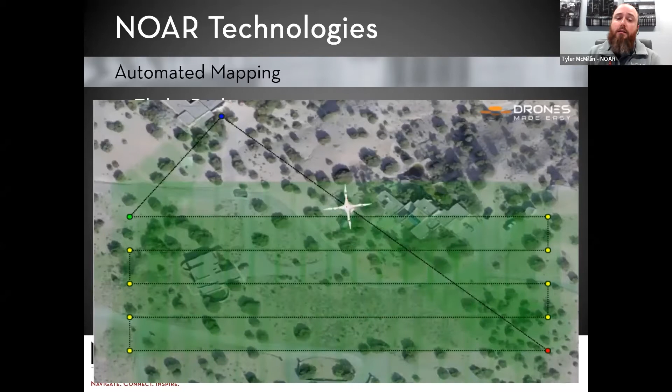So the video you see on your screen here is just a simple example. Essentially, if you have a construction site or a site that you need captured, we just window the area on our controller, tell the drone how high we want to fly, and then the software takes care of everything else. So it flies this automatic path, taking photos throughout the whole time, and that then gets processed into something usable for our surveyors or for our engineers and design team.

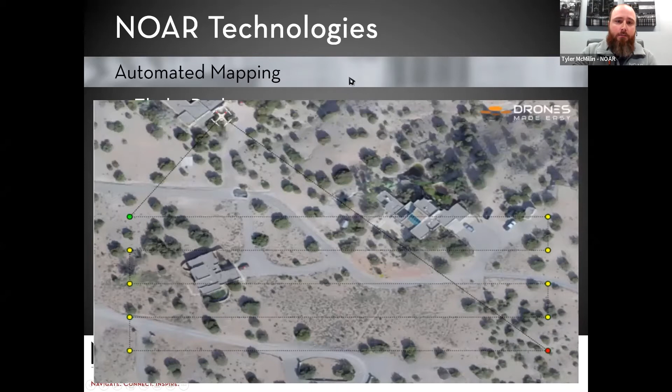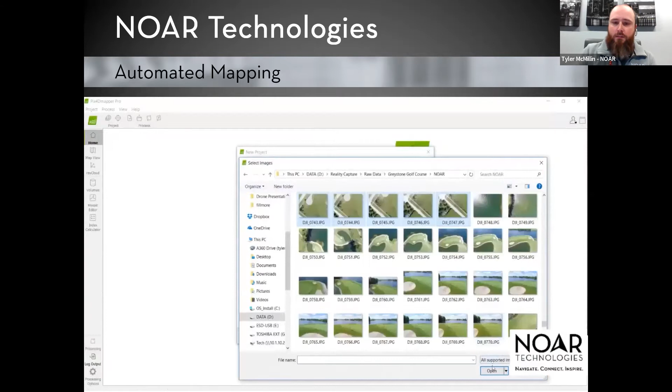So once the map has been flown, we're just left with hundreds and hundreds of raw images. So we need to convert those images into something usable, and we can use a variety of software. The one I'm showing here is called Pix4D. Essentially, we're dropping in all of the photos, and then we let the software run a photogrammetry process. This process involves matching the photos between each other and producing millions of points.

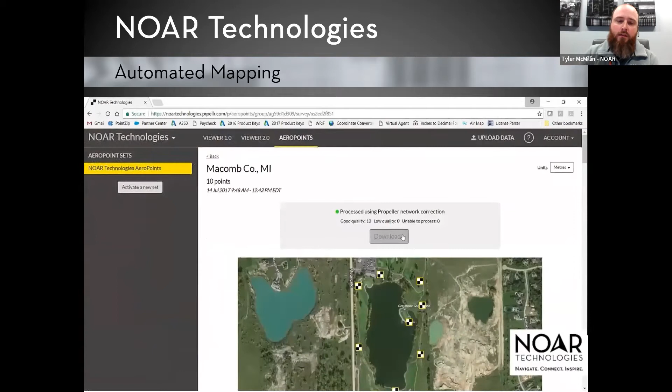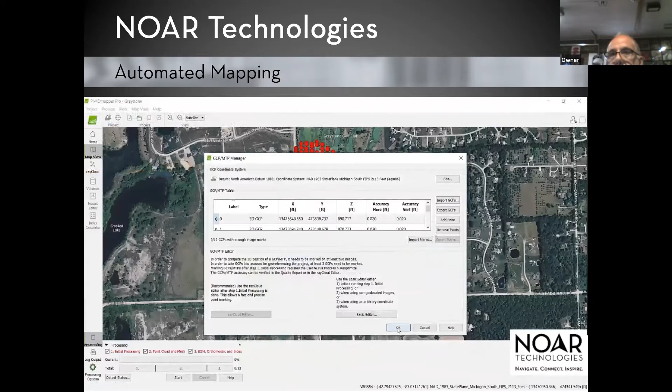We can geo-reference these models using either ground control points, GCPs, or some of the drones I'll be showing do have RTK capabilities, which is real-time kinematics. And what we're seeing here is actually entering in the survey coordinates for these photos. So we just have markers out or targets. We mark the center of the target, and that geo-references the entire model.

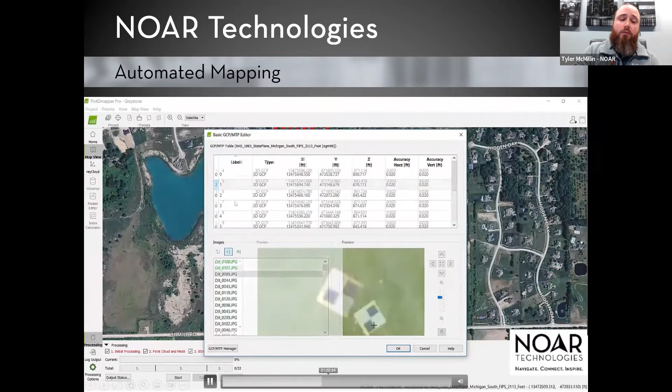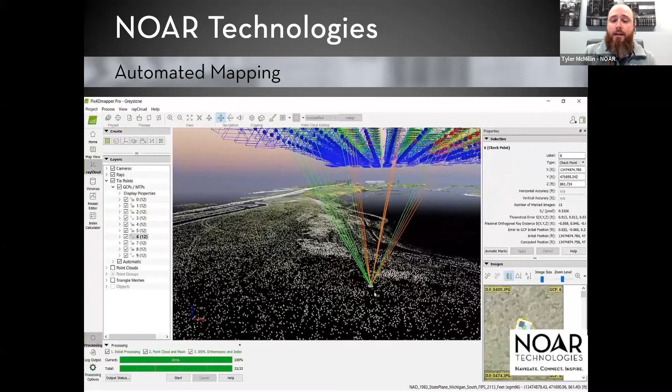Once processed, we end up with a large kind of point cloud. A point cloud is going to be just millions of points with an XYZ coordinate. And then just like a traditional survey, any point that is visible, we can get the XYZ coordinate and bring that into programs like AutoCAD or Civil 3D and use those for drafting and design purposes.

So the simplest deliverable that we kind of work with is the point cloud and the aerial ortho image, and that's just capturing the initial site development and site conditions. The beauty of drones is that we can capture these very, very large areas very quickly and use these for things like your historical preservation or just simple site and design planning.

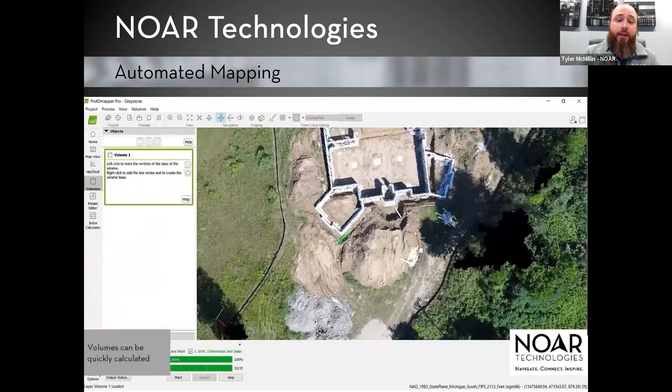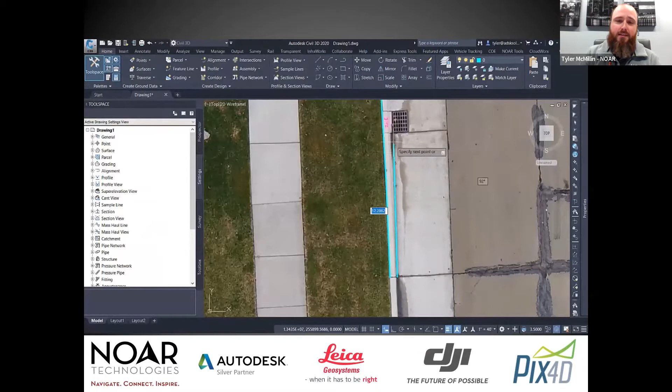A simpler deliverable is a geolocated ortho image. So what you're seeing here is just a 2D aerial image, much like Google Earth. But if you've ever taken a look at Google Earth, I know a lot of engineers use it as a reference, you might notice it's a little bit out of date. So capturing these sites with drone photos allows us to have an updated image that we can use for things like an ALTA survey or just site development.

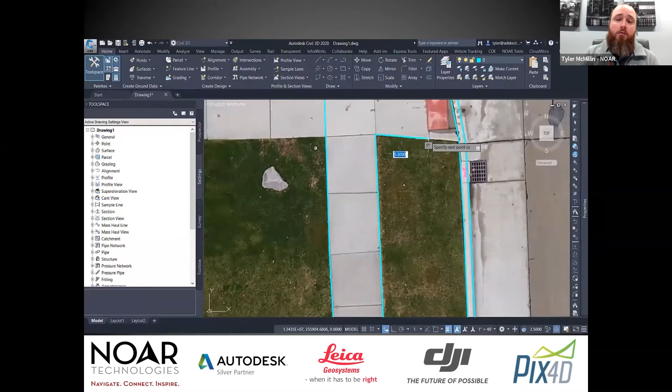We can also use these drones for capturing the site conditions before and after any construction, so we know if anything was disturbed or how things have been moved and changed over the lifespan of the project.

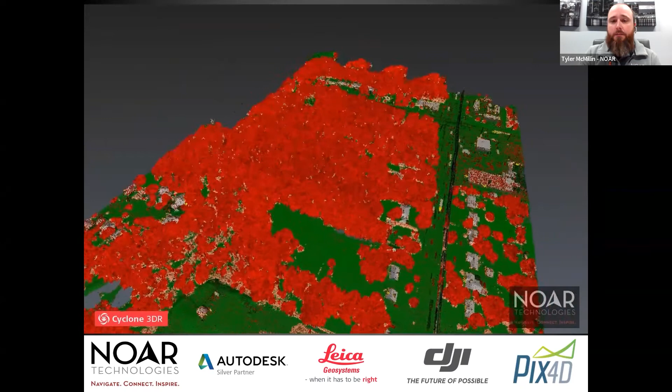In addition to our normal ortho image, we can also take a LiDAR laser scanner and fly over areas that are heavily wooded or covered with vegetation. We can then remove things like the vegetation and tree coverage to create an existing ground surface. For construction planning or surveying, getting your existing ground is really the first step for the project, and with LiDAR systems we're able to cut through heavily wooded areas or vegetation.

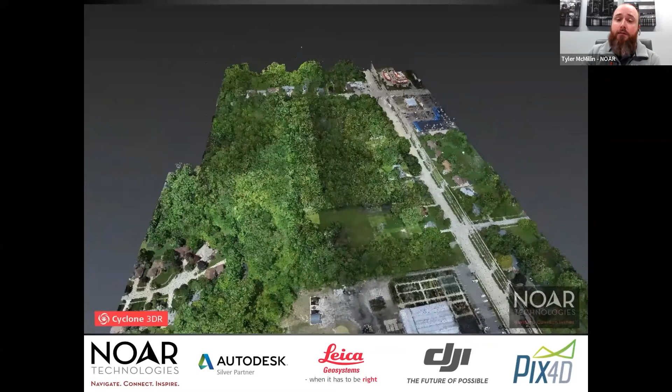Traditionally surveying a site like this down in Cleveland, where they're developing this wooded area, the surveyors on the call will know that surveying in the woods takes quite a bit of time and is not the easiest thing in the world. We can do this with our LiDAR drones in a matter of minutes.

These mapping flights tend to take about a half hour. The largest site I've ever done is about 1,200 acres, and that took roughly 6 hours of flying. So we're covering very large areas very quickly.

Now, the drones we're using, like I said, NOAR Technologies is a DJI Enterprise dealer, meaning we focus primarily on DJI drones. There are a few different entry levels for these drones. The basic one I want to look at is the Mavic 2 Enterprise Advanced. The beauty of this drone is that it packs a ton of power in a very small package. This drone actually folds up to about the size of a bottle of pop, can fit in the palm of your hand, but is capable of quite a bit.

So this does have a thermal camera on it for things like thermal inspection or heat loss for buildings. Local police are using these for search and rescue missions, and just our basic photogrammetry process as well.

So this is the smallest drone that I really work with. It has full 360 collision avoidance, so it's very difficult to actually have a collision with this. It does sense all the obstructions around it, and then has a variety of attachments that we can add on for various uses. This one comes in around $6,500, and again is the smallest one that we offer.

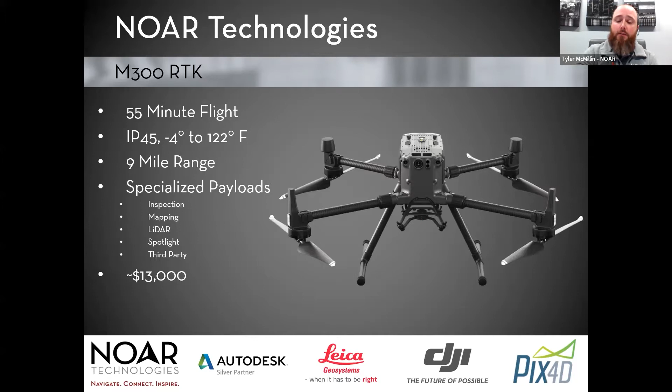So with that, drones are being used throughout the country for a multitude of industries and are incredibly easy to use once properly trained. We here at NOAR Technologies, myself being the primary trainer, can get everyone trained and ready to fly their job sites. If anybody would like to see some of the sample data, I can share that after the meeting.

I can send out some links to aerial ortho images for things like site development or the 3D models for the point clouds. My contact information is there, tyler@nortech.com, or you can call our office anytime for more information. So with that, kick it over to, I believe Bob is next.

No, it's probably... there you go. Yep, there you go. Is it? Okay, good. All right, really sorry about that, I don't know what happened to my Zoom screen.

Anyway, I'm Robert Fraus, I'm with Nowak and Fraus Engineering. I'm sure many of you in the construction and inspection side of things are pretty familiar with our firm. We've been around for over 50 years, and our primary business is civil engineering, planning, as well as land surveying.

We got involved with drones probably about 7 years ago. Mostly what we use it for is to supplement our surveying with aerial photographs, which helps our crews develop survey drawings and stuff like that. It also cuts down on survey time. You saw some brief examples that Tyler showed earlier, and we use it a lot for that just to save time.

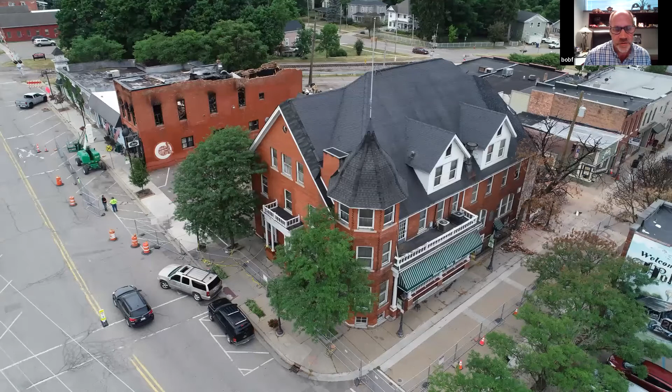The next site we did was for Oakland County and Ron, this is the Holly Hotel fire. We volunteered our services to do some after photos of the hotel. I'll just pan through these. The thought was, and Ron can tell you more on this, to assist the fire chief in examining areas of the hotel aftermath, since the second story of the hotel was not accessible to people. That was another point why we flew it. There you go, some still images of the aftermath.

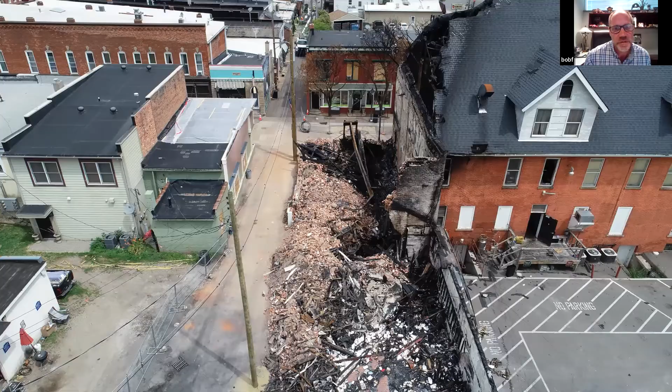Unfortunately in PowerPoint I can't really zoom in, but if you look at the original photos, you can zoom in on the boards and the bricks and all that. They're very detailed photos that you can use for inspection.

The next property we did was for the Historical Department of Oakland County, for Ron. He asked us to fly the 28 North Saginaw, which I believe is the Oakland Center, Oakland Town Center building. We did photographs of the entire building for the purpose of inspecting the brick and the windows and whatnot, and I'll go through a few of these photos for you.

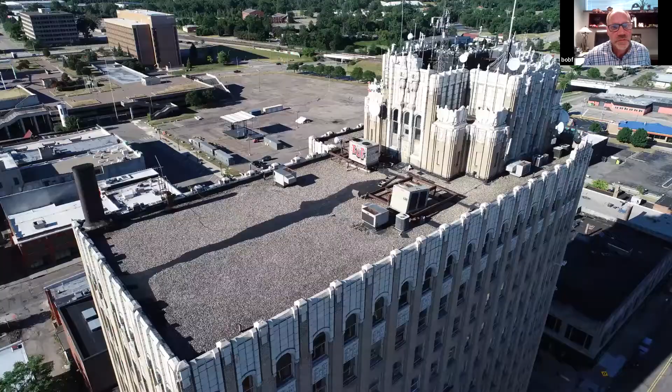I do have some additional photos that I'll try to share with you that hopefully will show you more of the detail of this building. This concludes my PowerPoint presentation, but I'm going to get out of here and share with you these images.

Now, can you guys see this image? No, we still see the Windows Explorer. Is it pulling it up on a different screen maybe? Okay, yeah, I wonder why. Can you pull it over maybe to - oh, here we go. There you go, yeah, yes.

Okay, so this is exactly what we issued to the Detroit Yacht Club. This is a PDF - again, I'm not sure how to add this into a PowerPoint video, so I'm an amateur, I apologize for this. But what you're looking at is the actual PDF drawing, and this is obviously the area I showed you, the orthomosaic area that I showed you earlier.

When we develop PDFs, we have a layer system, and what I'll do is I can turn off the image. What you see here is the drawing that we issued to the Detroit Yacht Club based on the survey control as well as the area.

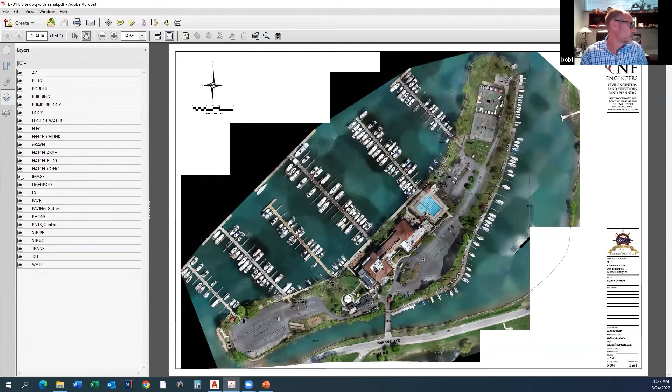I know Tyler talked about this, but for the Detroit Yacht Club, flight time was probably 15 to 20 minutes max. Setting the control points was probably about 20 minutes. So in really under an hour, we were able to collect the field data in order to develop this drawing that you're looking at, which normally a normal field crew would probably take 2 to 3 days worth of work.

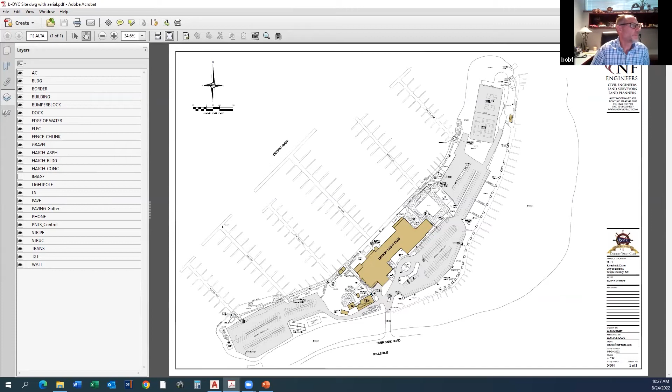And I hopefully this is - oops. Are you able to see this video? No, we're still seeing it on the screen. Can you pull it over to? Yeah, I don't know why it won't flow over. Yeah, that's on.

Okay, here we go. Yeah, I don't know, I know you can probably see the little video on my screen here. I'm not sure when I click on this box, it goes to my other screen and I'm not able to share it. How's this, guys? There you go. There we go. Okay, anyway, this is

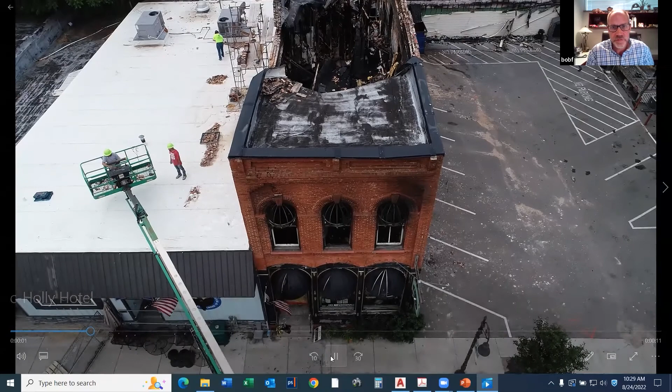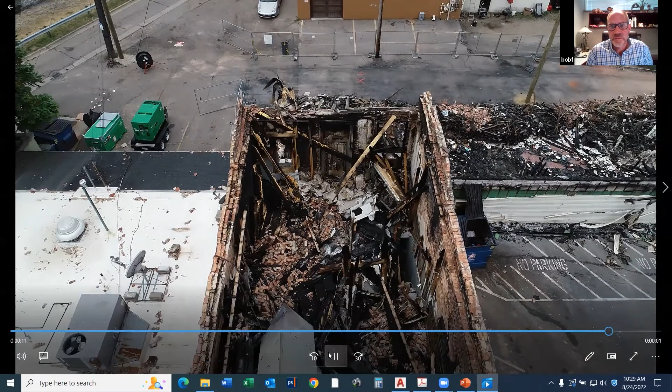This is the Holly Hotel video that we shot instead of the still images. Just a quick video, but hopefully your screens can show the detail that we're getting with the drone, just with a video.

Are you able to see this video, guys? Yes, okay great. This is the Oakland Town Center building, and this was for your external inspection of the building. I'll just pause it here. Again, we flew a video and you can actually pause and take screenshots. Hopefully you guys can see it on your end, but you can kind of see the detail of the building and the windows. It's very useful for inspections if there's cracks or window repairs.

It's a really very good tool for a quick inspection of any building, especially these older sites. Getting up towards the top, you can kind of see the deterioration of the building, which, before drones, you would have to use scaffolding or window washing platforms to get an idea of what's going on with your building.

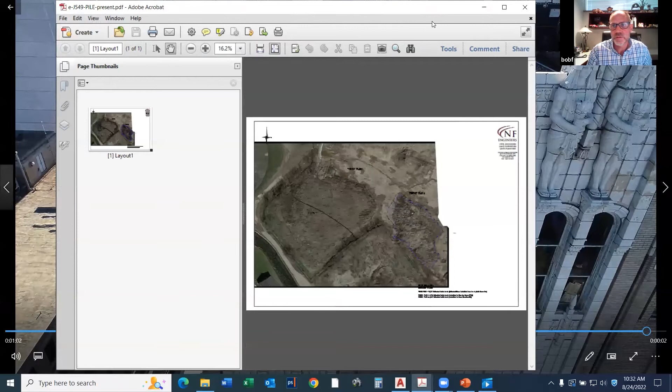The next thing I wanted to show everybody - are you able to see this PDF? Yes, thank you. We've used the drone along with software to do calculations of soil piles. In this circumstance, this is in Pontiac. The client wanted the volume of the soil piles so they knew how many trucks they needed to remove it. We use the drone along with software to calculate the areas of these piles.

Underneath you can see the image here, and from this image it developed into what's called a point cloud. We use the point cloud to acquire the contours that you see in this image right here. Once you provide that, you can calculate based on the contours the volume of these piles, which is down in this summary below.

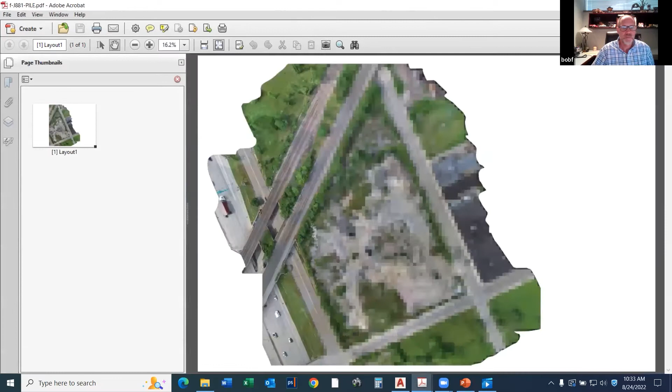And here's another one - this is another soil pile calculation, this one's in the city of Detroit. You can see the image. Take that off - there's our topo. So this drawing is 100% developed just from the aerial image of this drone.

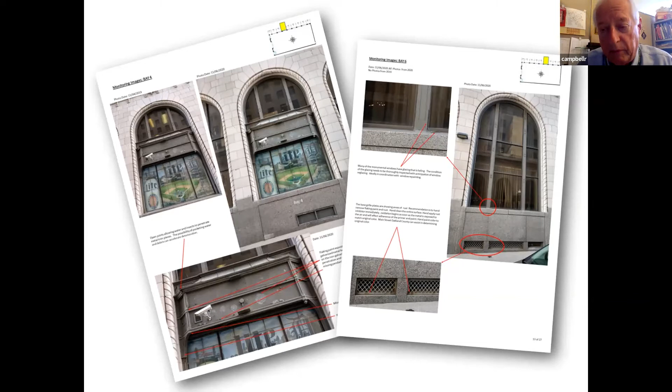I'll share a few of those with you. It also sometimes, not in every case, gives solutions - measures that can be taken to correct the problems. We could always capture everything at grade level, and we always had access to the roof, which gave us a little more access to close-ups of some of the terracotta, but it was always from a distance. So we would never get images like this from the street view.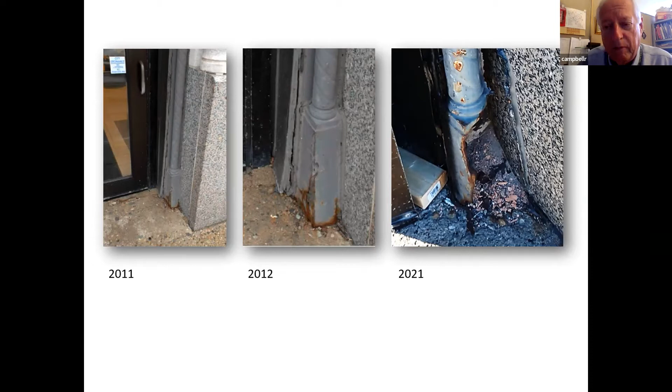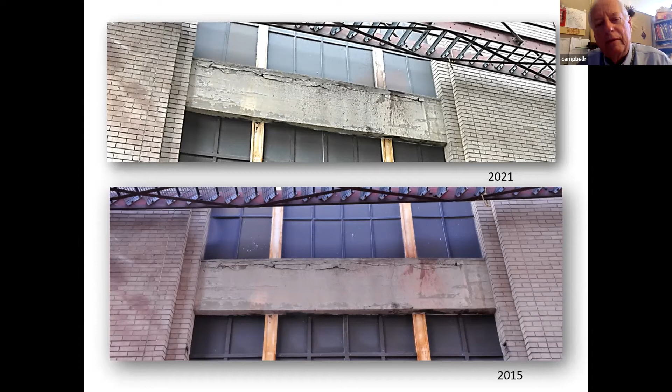As the new owner is converting this and improving the facade, we shared this with him, and he gets a better idea of the work that's going to be required, as well as the contractors that will be involved. What is the condition of the masonry, the individual bricks and mortar, and what is the condition of the terracotta? We can access this through the drone much more easily than with scaffolding, and I'm certainly not going to rappel off the building.

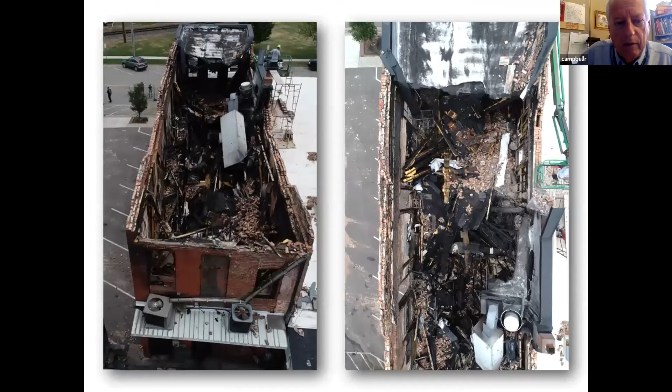Here we were able to use the footage from the drones, both stills and video, and we could get into this building. Now, at this time it was not allowed to get in there, so we couldn't assess it from the actual ground floor.

But there was scaffolding going out when we were testing the walls. They were getting prepared for the structural analysis and the engineer to get in there. So we were able to use these photographs to really get some close-up images of the damage and perhaps where we really need to investigate.

With that information, we prepared a document to send to SHPO. It gave the location, it showed the extent of the damage that was occurring, and they were very pleased with it, and they got right back with us.

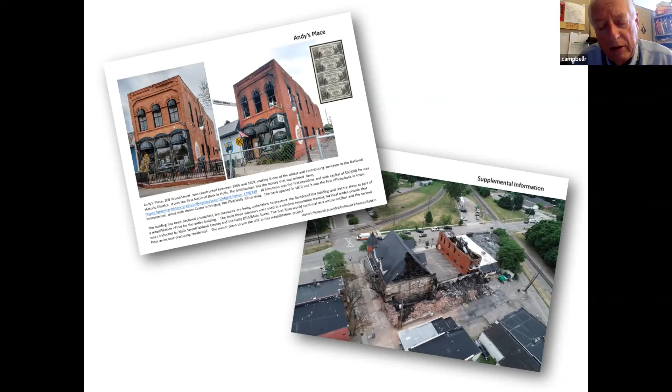They said the one building, the Antiques Arcade, cannot receive the tax credits. The hotel certainly can, and we're still working with them to get Andy's, and it really depends on how much has been destroyed and how much can be preserved.

We feel that the front wall, we can preserve all that and restore it. The side wall, we're having to take that down about 4 courses. We're going to reinforce that along there. So we can save at least the 2 principal walls of the building and possibly a 3rd wall, and maybe even the side wall, the back wall, depending on what we find when we actually get into it.

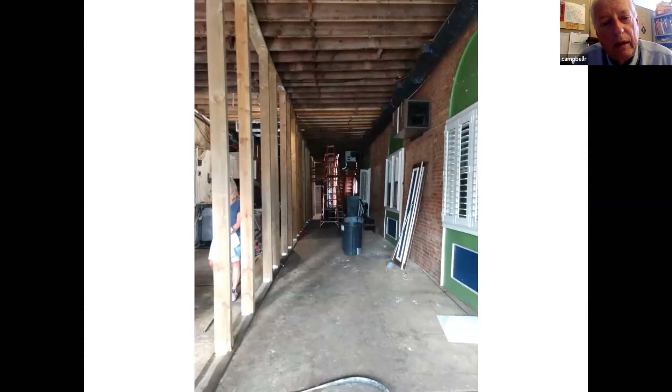The new lumber you see, that's all shoring that's going up so that we could get the weight off of the upper floor. Upper floor, that's had a lot of cleaning and refuse removal. The bracing is in place to hold those walls until we get a roof on it. That's the first priority, is get a roof on it, seal it off before weather sets in.

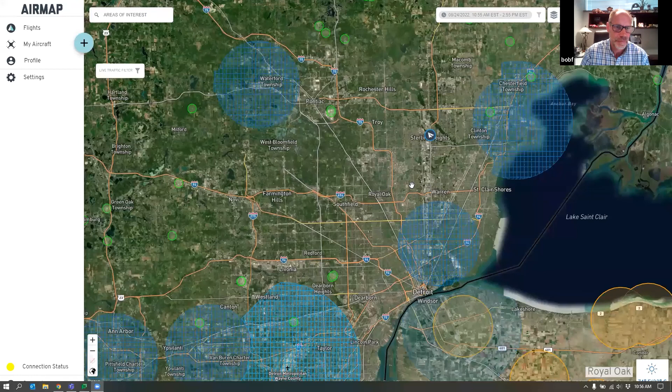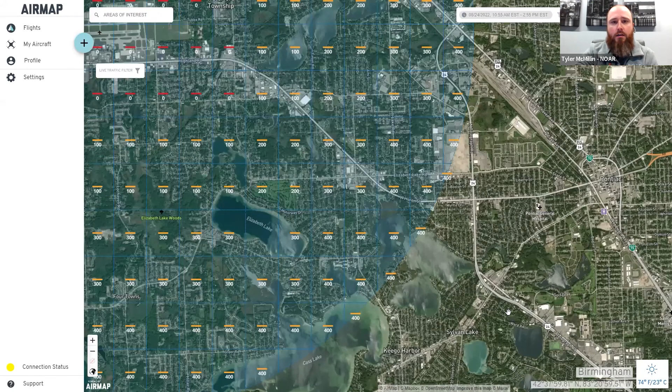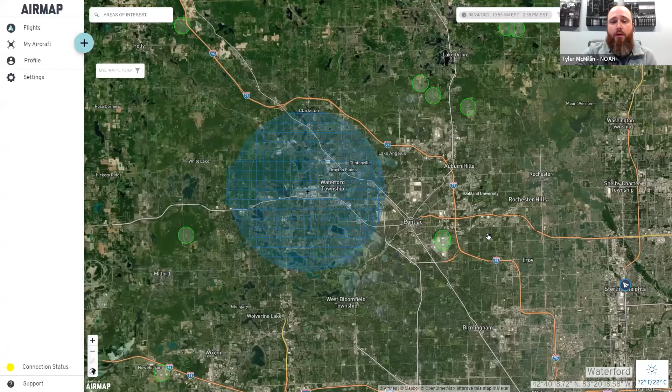...the location. The FAA has come out with a system called LAANC, where basically if you're flying near an airport, most of the country has this kind of grid over the airport where you can get instant approval to fly up to certain elevations. As I zoom out, anywhere in Michigan that doesn't have one of these blue circles is unrestricted airspace — you do not need FAA permission to fly. So it's really only around airports that we have to get that FAA approval.

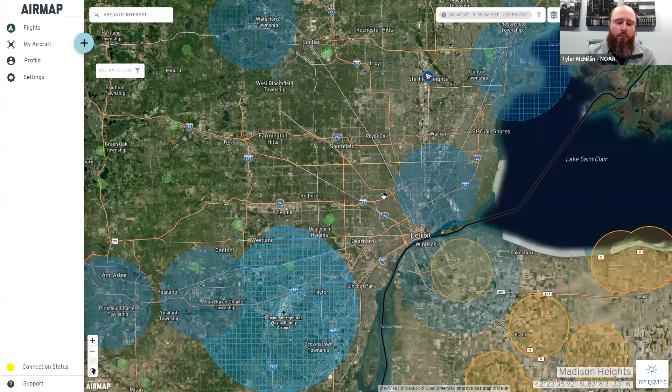So it's become significantly more streamlined. It used to be a 90-day process to apply for permission. Now it's just an app on your phone. You window your area and get instant approval to fly.

Excellent. Okay. Hey, thank you. Tyler, I want to add to that.

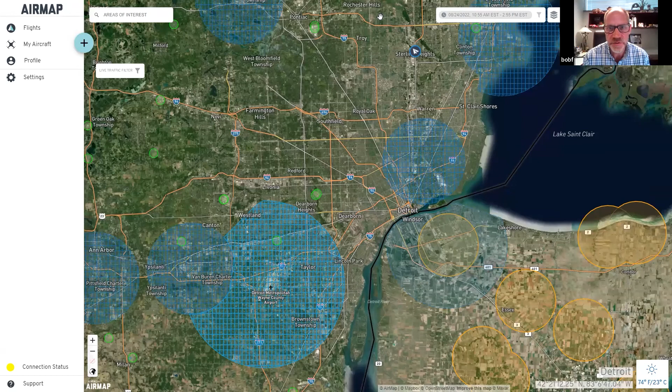I don't know if you know this, but the FAA actually submits that to the control towers. We had a site flying near the Flint airport, and the tower actually called me on my cell phone to verify what we were doing. I was surprised because I thought it was just an automated system to track people, but it's actually real time.

Yeah, it goes to air traffic control, and they approve or deny it based on what you're doing and where you're flying. So you have to enter your pilot license information and all of that.